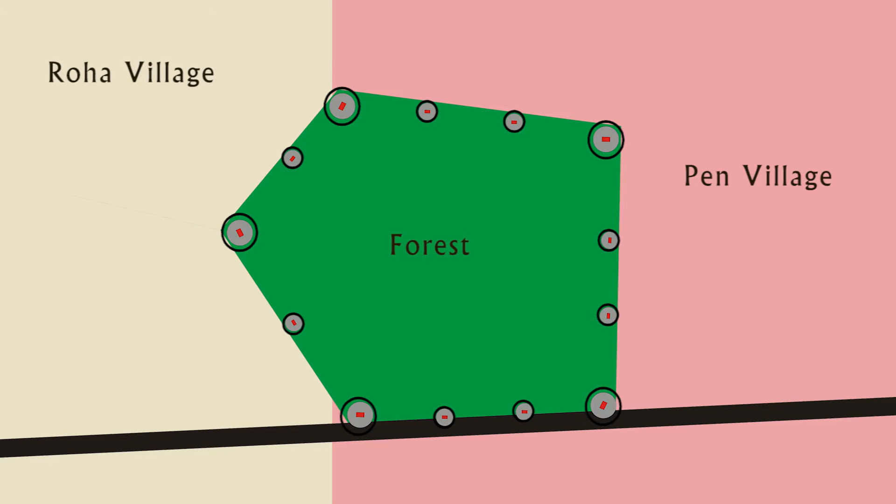The first class boundary pillars are erected on boundaries of forests at main points and at angles where the boundary of a forest block, forest compartment or a village intersects the forest boundary. The second class boundary pillars should be erected at intermediate points not exceeding 250 meters such that the next pillar on either side is clearly visible. Each pillar should be given a serial number. Fresh series should be given for each adjoining village in clockwise manner.

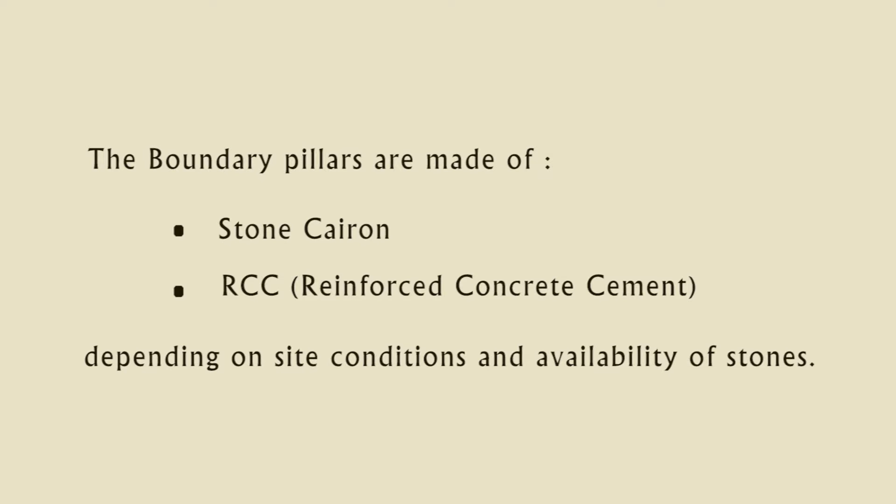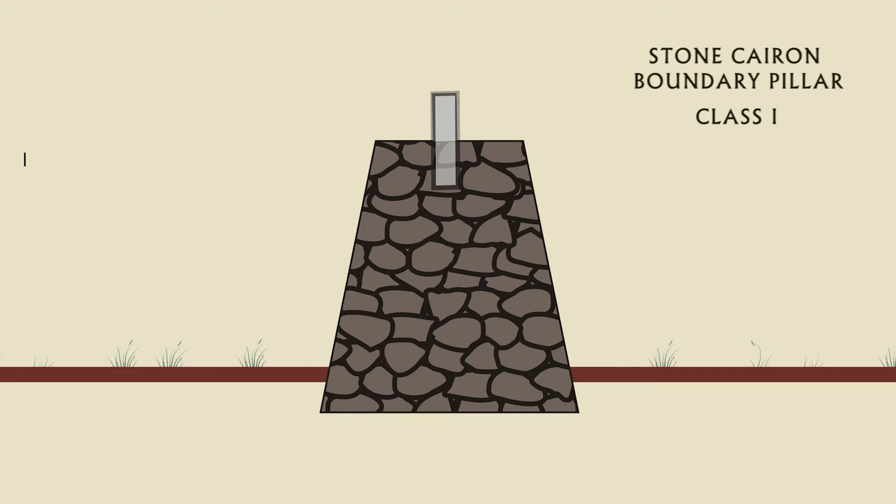Boundary pillars are made of stone Cairon or RCC, that is reinforced concrete cement, depending on site conditions and availability of stones. Specifications for stone Cairon boundary pillars. The first class boundary pillar shall be constructed by using hard stones. The depth of foundation should be 30 centimeters. The diameter at the base should be 2.10 meters. The diameter at the top should be 1.2 meter. The pillar should have a height of 1.5 meter above ground level.

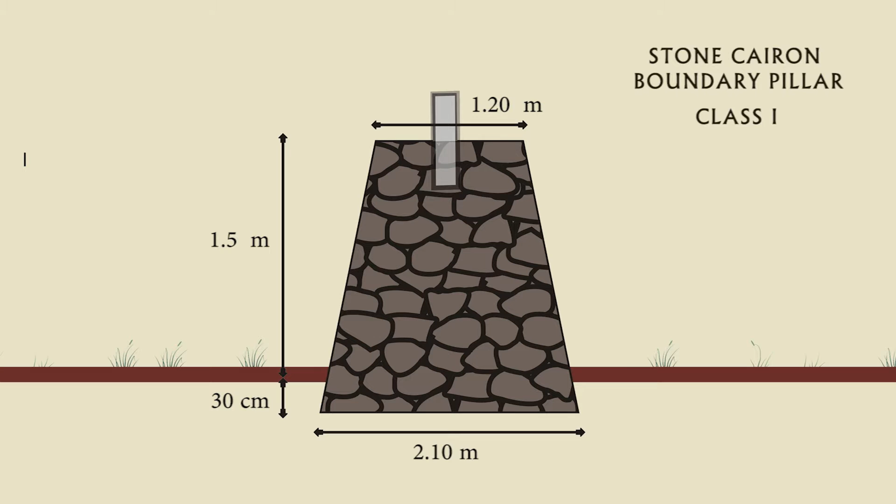A cut stone slab having overall dimensions as 20 centimeters length, 15 centimeters breadth and 80 centimeters height should be erected at the center of top. It should project 40 centimeters above the Cairon of stones and 40 centimeters into the Cairon. The total height of the pillar should thus be 1.9 meters. If cut stone is not available, wooden stick or any other available stone may be used.

आता आपण ज्या ठिकाणी उभे आहोत ते ठिकाण म्हणजे अंबू फॉरेस्ट कंपार्टमेंट. We are at the boundary of forest compartment number 225 adjoining private land of Ambu village. This pillar beside me is a class 1 stone Cairon boundary pillar number 23. On the side opposite to the forest we have the name of the village and compartment number written. Ahead of this on my left is pillar number 24. It is a class 2 pillar. Similarly on my right there is class 2 pillar number 22.

For second class boundary pillar, the depth of foundation should be 30 centimeters. The diameter at the base should be 1.2 meter. The diameter at the top should be 0.75 meter. The pillar should have a height of 1.05 meter above ground level. A cut stone slab having overall dimension as 20 centimeters length, 15 centimeters breadth and 80 centimeters height should be erected at the center of top.

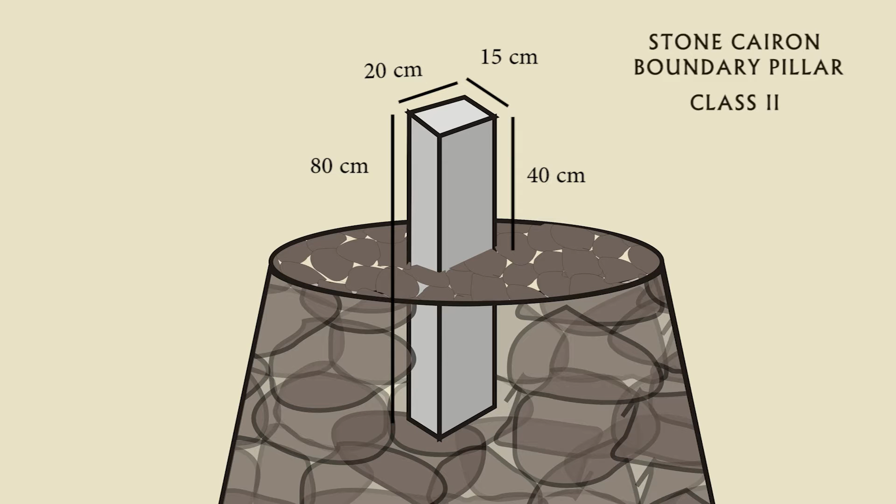It should project 40 centimeters above the Cairon of stones and 40 centimeters into the Cairon. The total height of the pillar should thus be 1.45 meters. If cut stone is not available, wooden stick or any other available stone may be used.

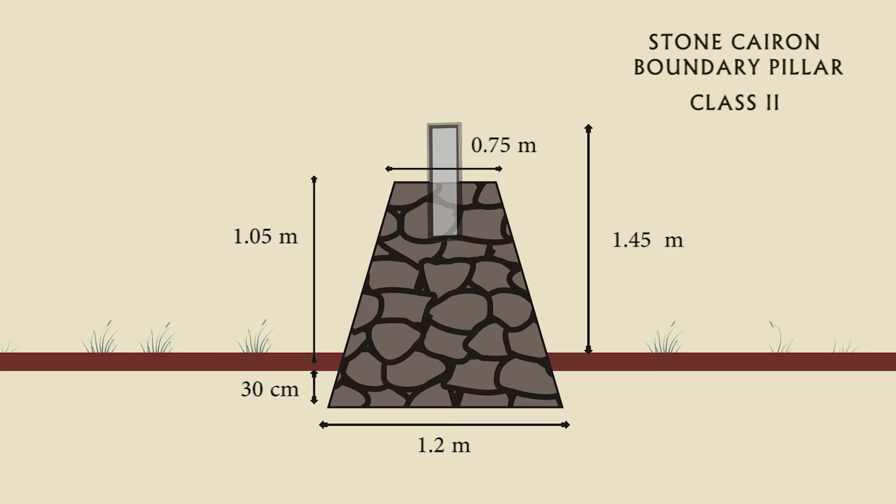आत्ता आपण मौजे आंबो. Here at the boundary of forest compartment number 225 and Ambu village is pillar number 22. This is a class 2 stone Cairon pillar, वर्ग 2चा आहे. The pillar number along with village name and compartment number should be engraved in the cut stone on the side away from the forest.

The cut stone on both sides of pillars should be colored brick red in case of closed forests. It should be whitewashed in case of open forests. A line having 10 cm width of same color should be applied to Cairon on either side, radiating from the center of the cut stone to show the direction of the adjoining boundary pillars.

Disadvantage of stone Cairon pillars. Forest resources are under pressure due to increasing population, urbanization and industrialization. The stone Cairons can be easily moved or damaged. They also need regular maintenance.

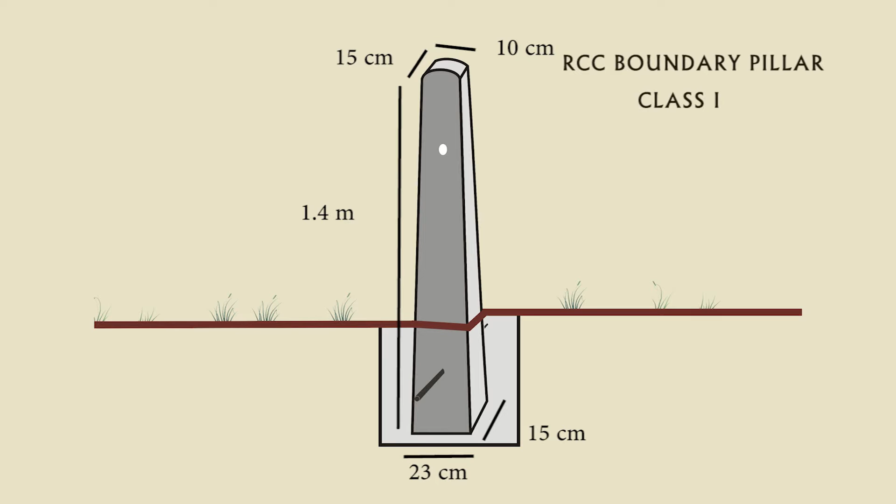Specifications for RCC boundary pillars. The first class RCC boundary pillar should have a top dimension of 15 cm length and 10 cm breadth. The base dimension should be 23 cm length and 15 cm breadth. The height should be 1.4 meters. It should have a hole 20 cm above the base through which a 16 mm iron rod will pass, which will help in anchoring the pillar.

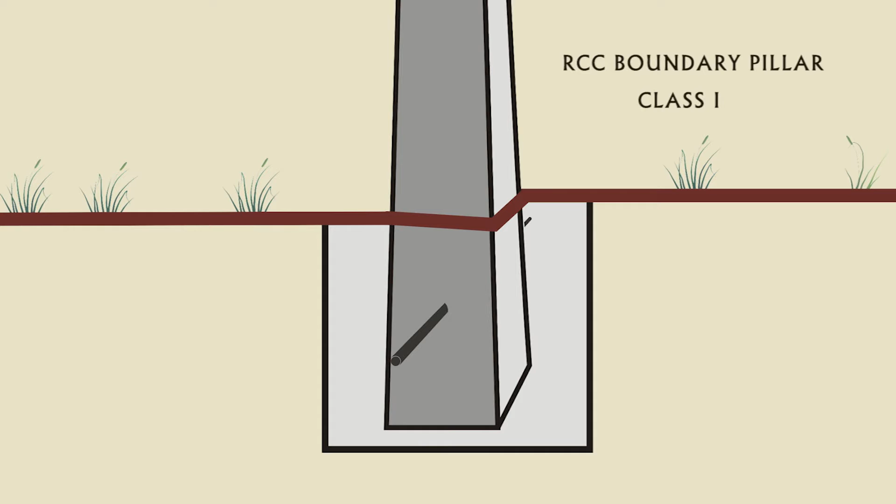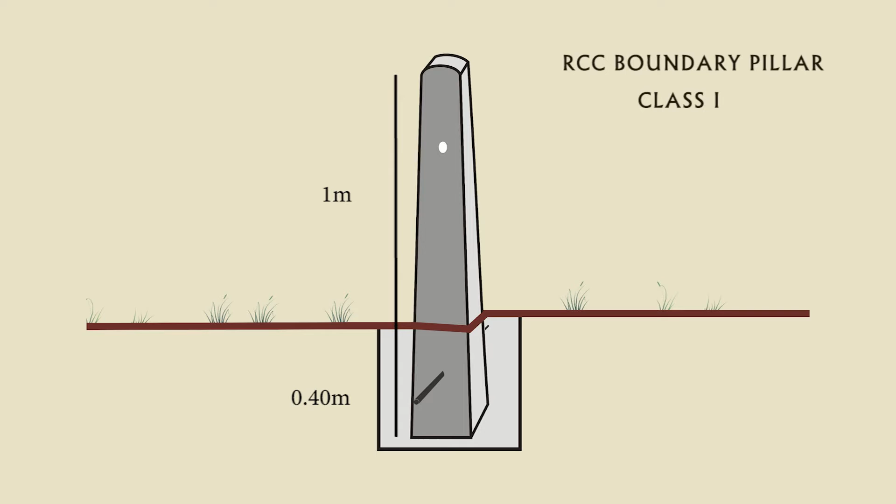The RCC pillar should be erected such that it is 1 meter above the ground level and 0.4 meter should be the depth of foundation. The pillar should be erected in foundation bed block of cement concrete mortar of size 50 cm length, 50 cm width and 50 cm depth.

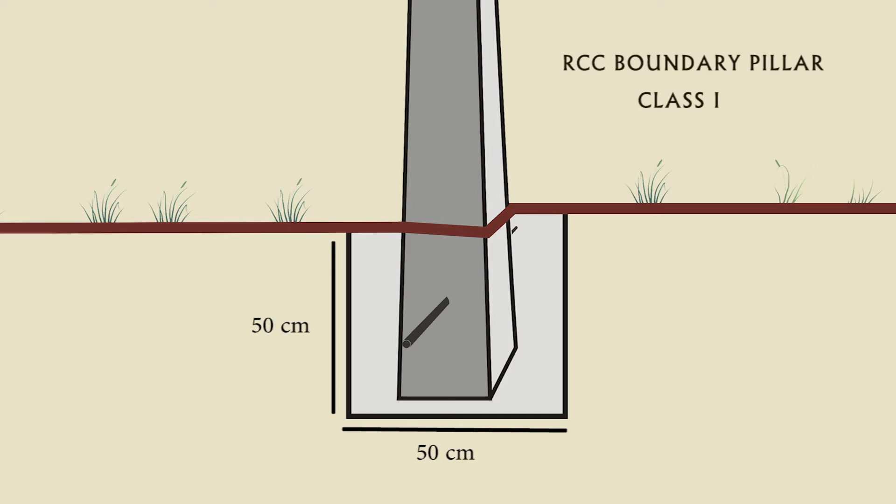वर्ग 1 नंबरचा पिलर हा RCC मध्ये बनवण्यात आलेला. This is class 1 pillar made in reinforced cement concrete. On this pillar, we have written the name of the village, compartment number and the pillar number.

The second class RCC pillar should have a top dimension of 15 cm length and 15 cm breadth. The base too should be of dimension 15 cm length and 15 cm breadth. The height of the pillar should be 0.9 meters. The second class RCC pillar should be erected such that it is 0.5 meter above the ground level and 0.4 meter should be the depth of foundation.

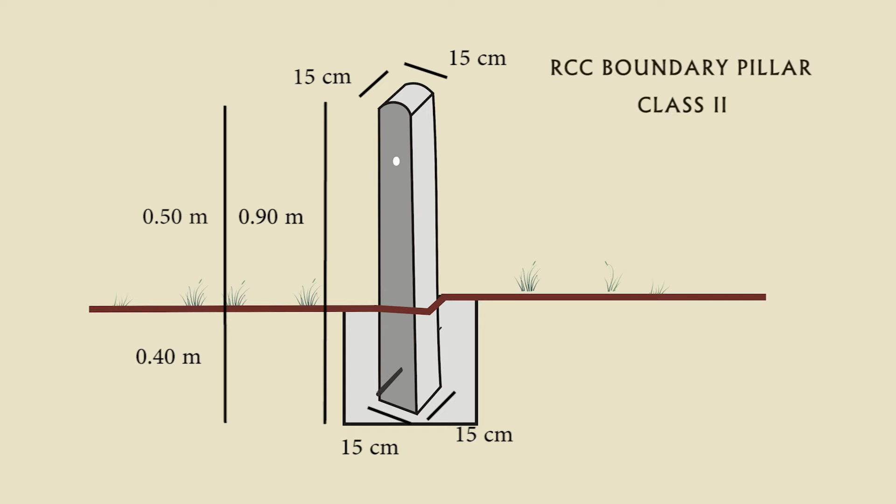This pillar should be erected in a foundation bed block of cement concrete mortar of size 45 cm length, 45 cm breadth and 45 cm depth.

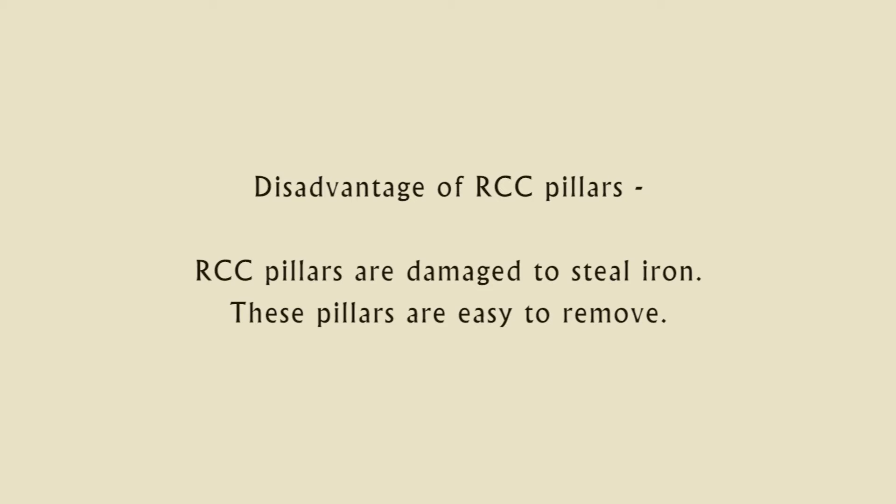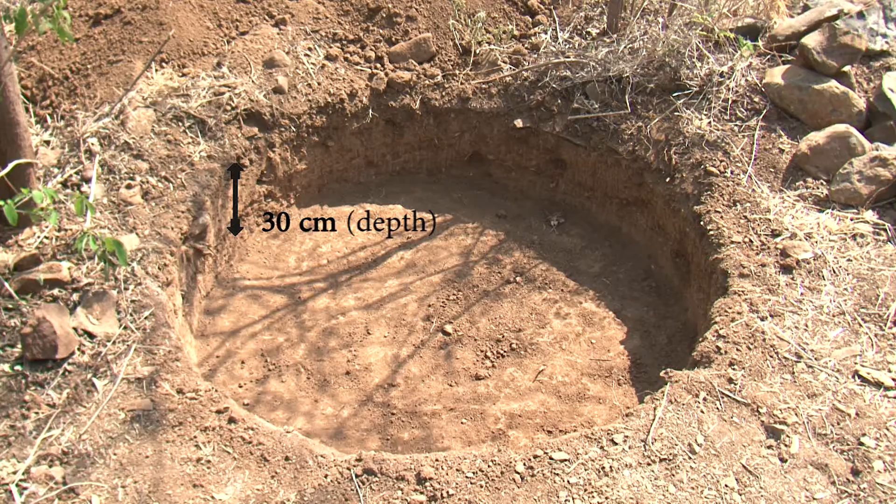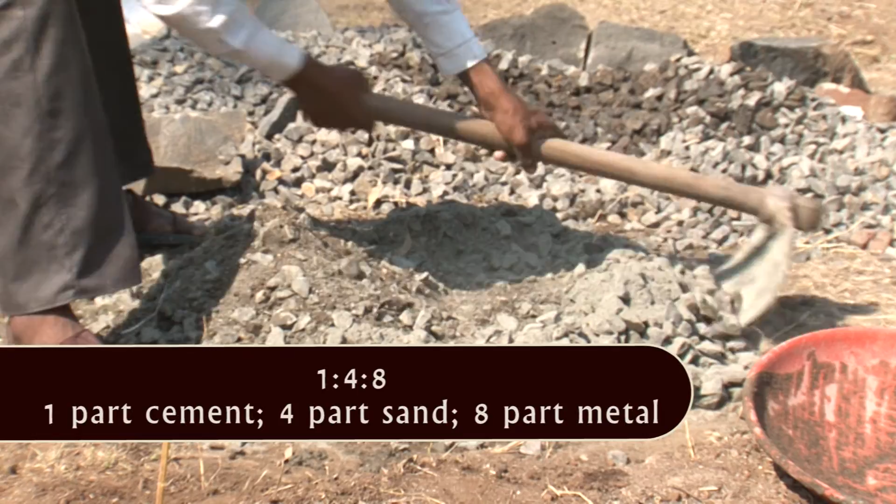Specifications for stone cairn boundary pillars in cement and concrete. First of all, a 30 cm deep foundation of diameter 1.4 meter must be dug and it should be leveled. After, 1 part cement, 4 parts sand and 8 parts metal should be mixed to make a concrete filling of diameter 1.2 meter and 10 centimeters thickness.

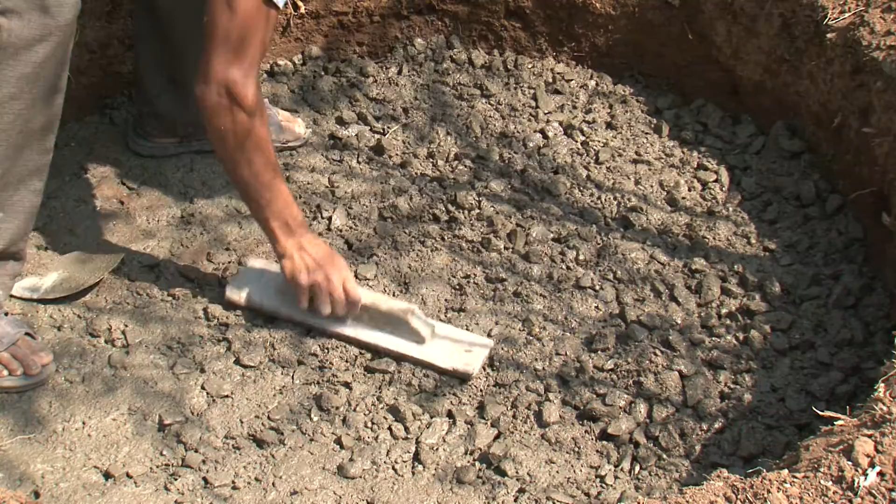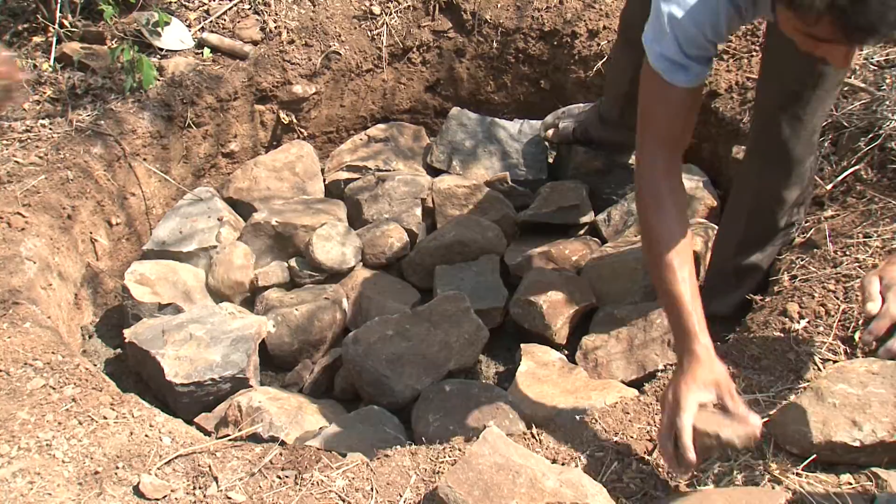The remaining 20 centimeters above the concrete bed and below the ground level must be built with big stones and mortar in the ratio 1:6, that is 1 part cement and 6 parts sand. Care must be taken that the cement and the sand is mixed well. Sand should be washed well before use.

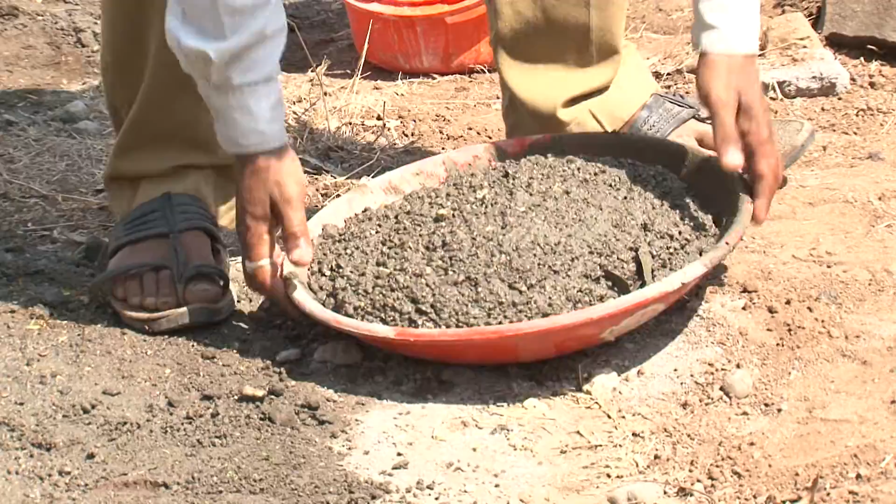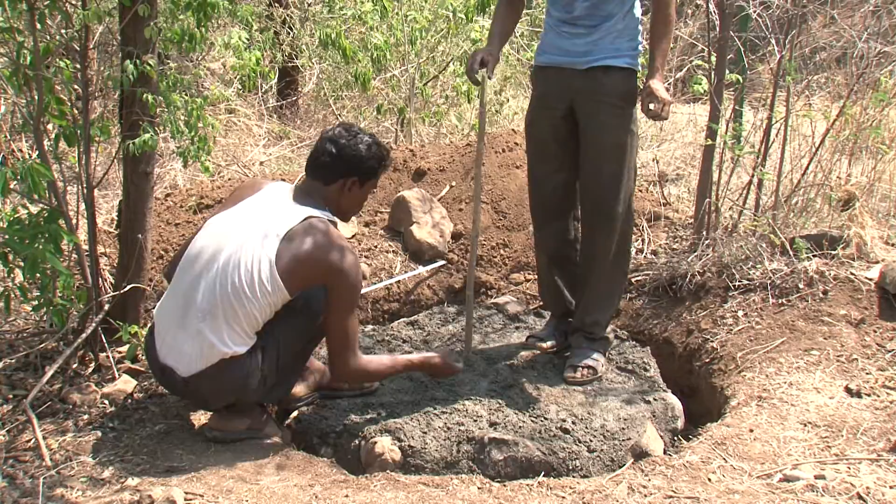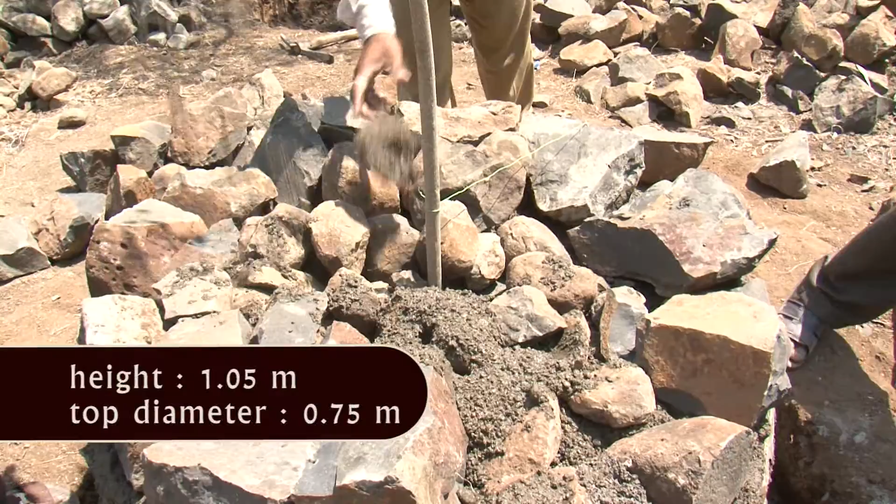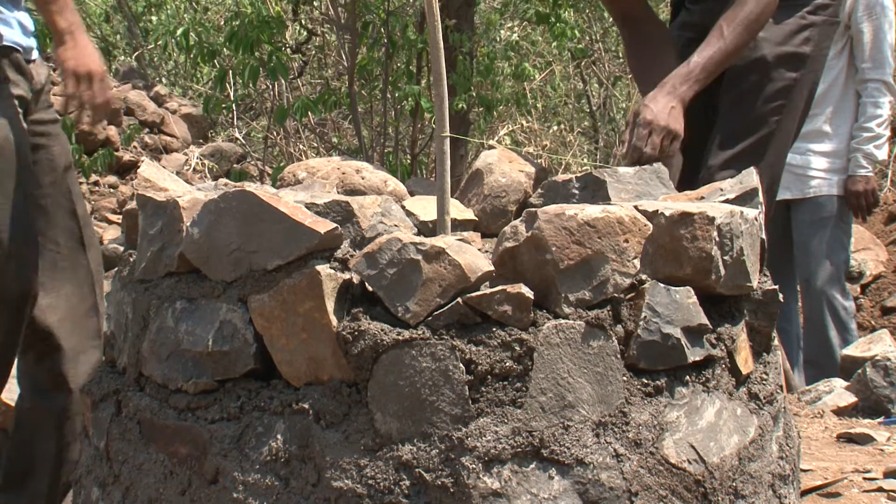Then, above ground level, the construction should be done with stones and mortar in the ratio 1:6, that is 1 part cement and 6 parts sand, till the height of 1.05 meter is attained and such that the diameter at the top is 0.75 meter. Then, on the top center, a cut stone for information should be fixed, of dimension 30 cm length, 30 cm breadth and 48 cm height.

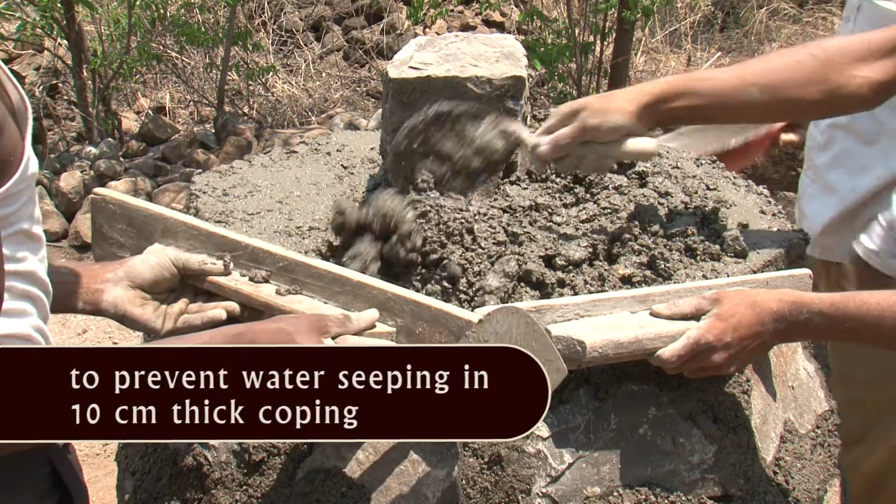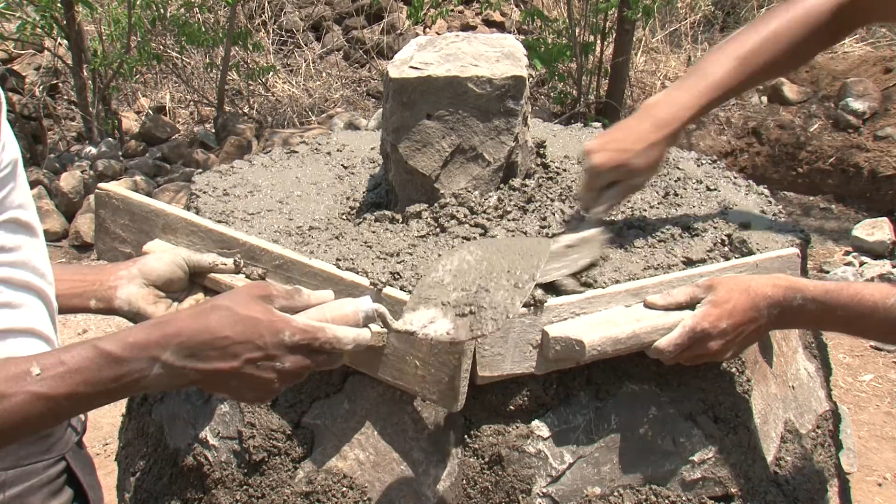To prevent cracks due to rainwater seeping into the structure, a 10 cm thick coping should be done. For coping, the mortar should be prepared in 1 part cement, 2 parts sand and 4 parts metal. Then, pointing must be done with cement and sand mixture in the ratio 1:6. This structure should be watered 2 to 3 times a day for 21 days.

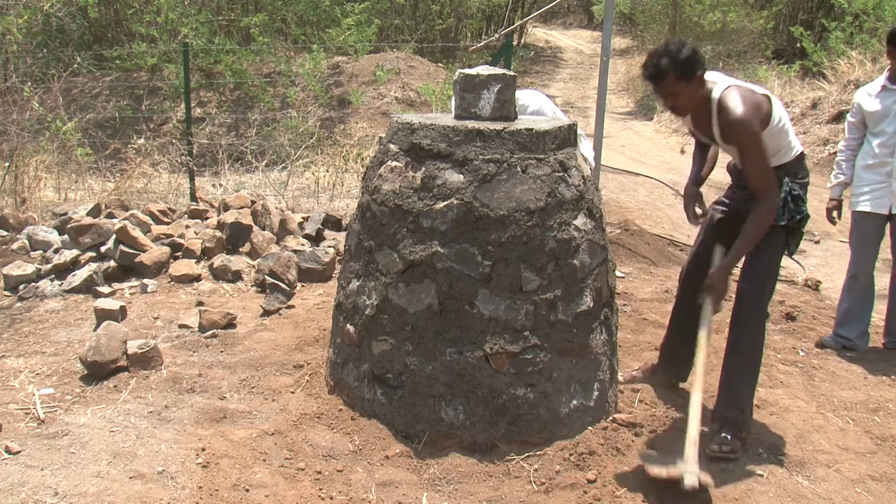Construction of such cairons should be undertaken between October and January when water is easily available in forests. This stone cairon built in cement concrete should be watered 2 to 3 times a day for 21 days. After that, we will whitewash it with lime. And on the side opposite to the forest, we will write the pillar number.

As per the working plan of Osmanabad division, this is pillar number 1366.

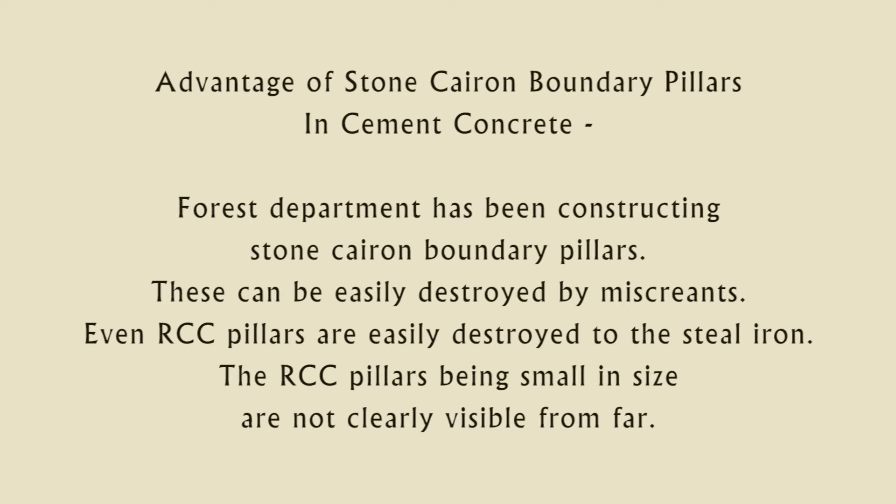Advantage of stone cairon boundary pillars in cement concrete. Forest Department has been constructing stone cairon boundary pillars. These can be easily destroyed by miscreants. Even RCC pillars are easily destroyed for steel iron. The RCC pillars, being small in size, are not clearly visible from far. In comparison, the stone cairon boundary pillars in cement concrete are better. Such pillars need little repair.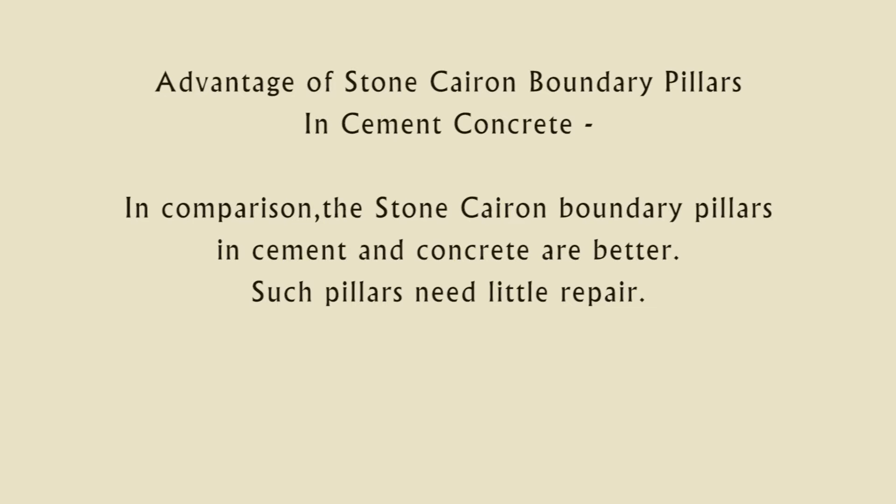Rules for inspection and maintenance. Forest Guard is responsible for maintenance, repair and protection of all boundary pillars in his beat. Every year after monsoon, he shall maintain and color all pillars and prepare a special report of having performed this work. Once every year, the beat guard shall inspect all pillars in his area and enter the record of his inspection in his diary.

The round officer is responsible for the condition of the forest boundary and all boundary pillars of his range. He shall see that the pillars are maintained in proper repair and color washed by the beat guard as directed. The round officer shall inspect every pillar of his round and make a note of it in his diary. He shall also submit a special report to the Deputy Conservator of Forest through the Range Forest Officer. The Range Forest Officer shall inspect 100% of all works.

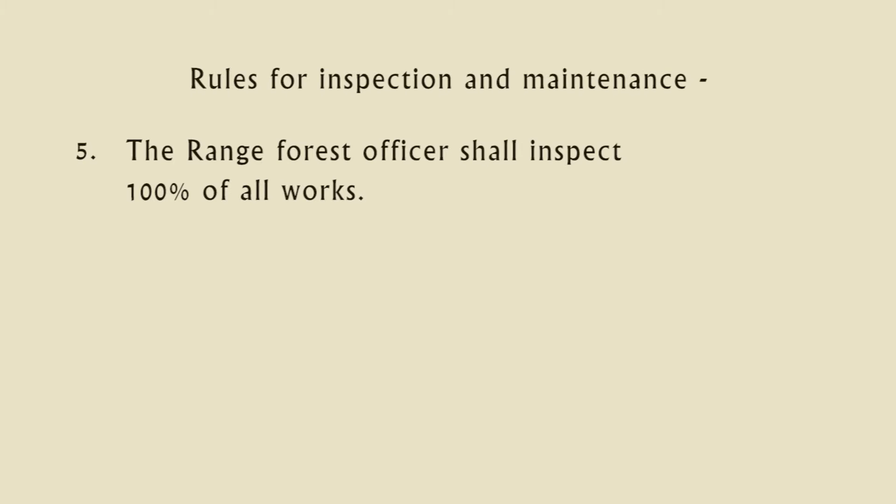The total length of natural and artificial boundary is calculated for the entire forest area as per the working plan. Thereafter, only the artificial forest boundary is divided into 5 equal parts, as per compartment number, length and range for every year. Accordingly, maintenance of each part shall be done every 5 years and thus provision shall be made in the working plan.

The Range Forest Officer during the official year shall inspect the condition of all the boundary pillars of not less than 3.2 kilometers of the forest boundary in every beat in his range. He shall submit a status report of the same to the Conservator of Forests through the Assistant Conservator of Forests.

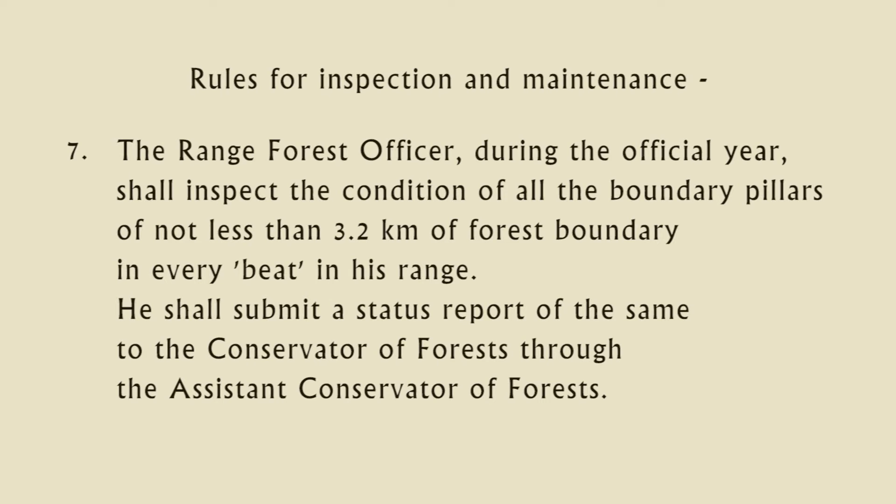Important. As per Section 63C of the Indian Forest Act 1927, whoever, with intent to cause damage or injury to the public or to any person, or to cause wrongful gain as defined in the Indian Penal Code, alters, moves, destroys or defaces any boundary mark of any forest or wasteland to which the provisions of this Act are applied, shall be punishable with imprisonment for a term which may extend to 2 years, or fine, or with both.